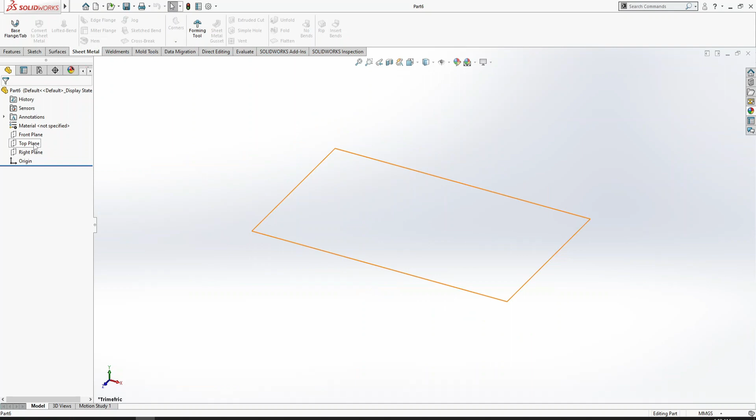To use this, first we have to create a sheet metal. For this, top plane, sketch, simply a center rectangle, make a rectangle, and dimensions. That's 150 mm, and this one 100 mm. Now sheet metal, base flange, and 2 mm, yeah, it's okay, 2 mm.

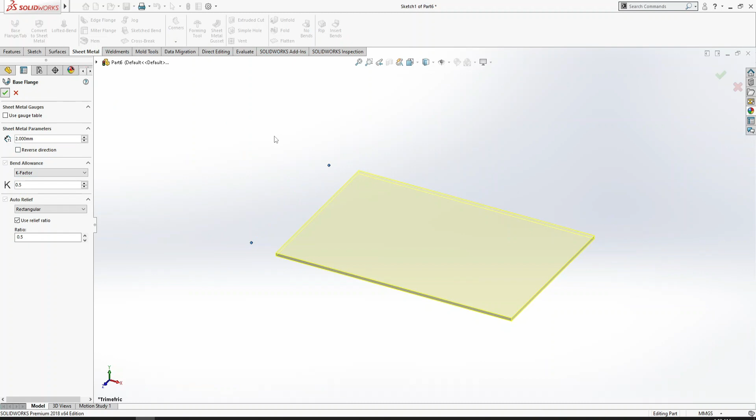Now we have created a base flange, that's one sheet metal. Now if you want to use hem, hem means curl edges of a sheet metal. So how can we use it?

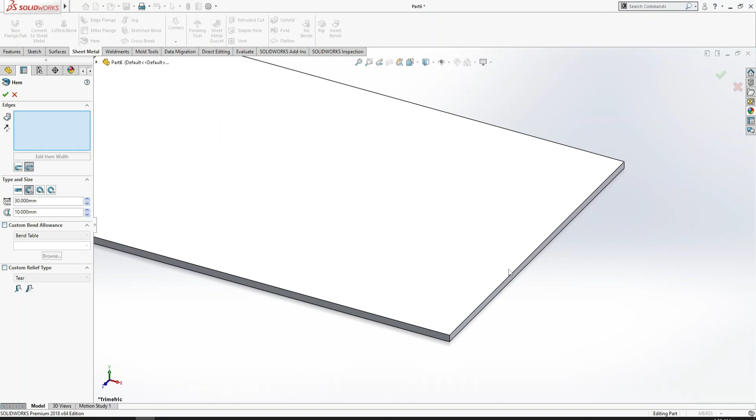If I click on hem, it's asking me to select an edge, so I have the edge here. You can see how it's going to create a hem. If I click here, it will create it inside of the sheet metal here.

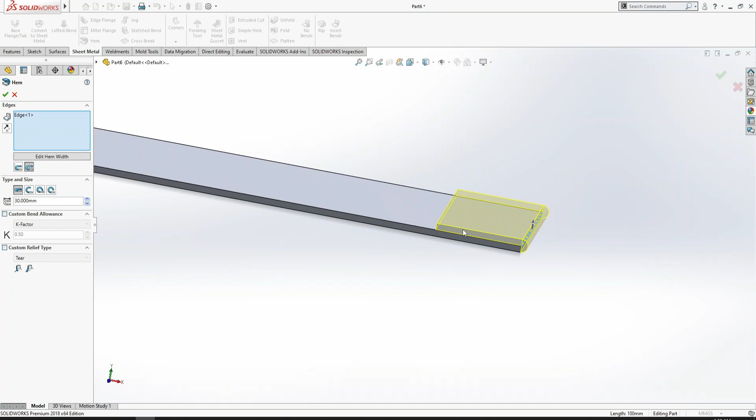We have four options for the hem. Closed hem means it will give zero space between these two surfaces. If I click on here, so I have the option radius, how much I want to give the radius. That means from here to the center of this semicircle. That's 5 mm. If I 15 mm,

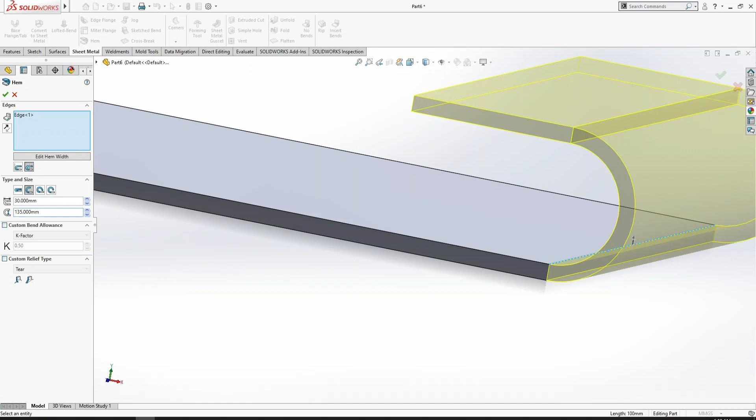15 mm, okay, again edit features. Let me explore you, this one is the second, open. The next one is teardrop, and the last one is roll.

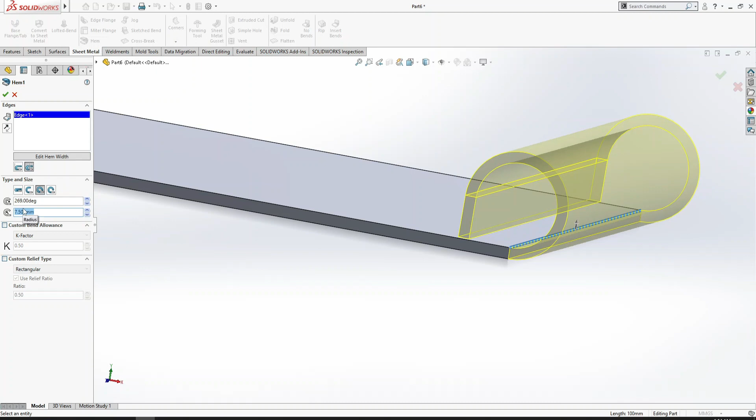So we can use only 270, 269. Okay, and I can change the radius, that means from here to here distance, 9 mm, 19 mm. You can see how it's changing.

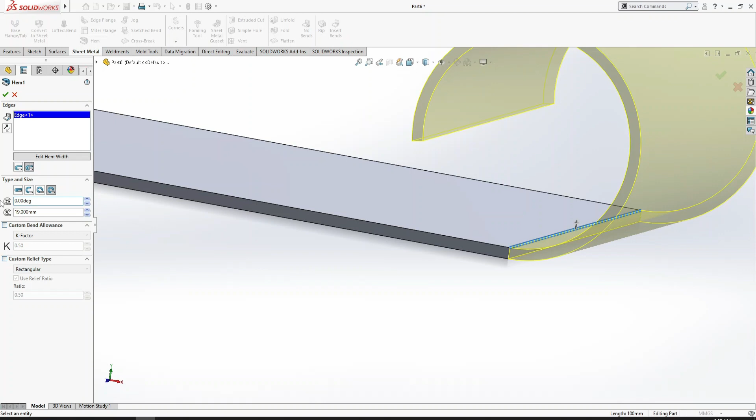And the last option is the roll. And here I can change to 80, 350, it's okay.

It's going to create a roll. Let's change 30 mm, okay it's going to be too much, 10 mm.

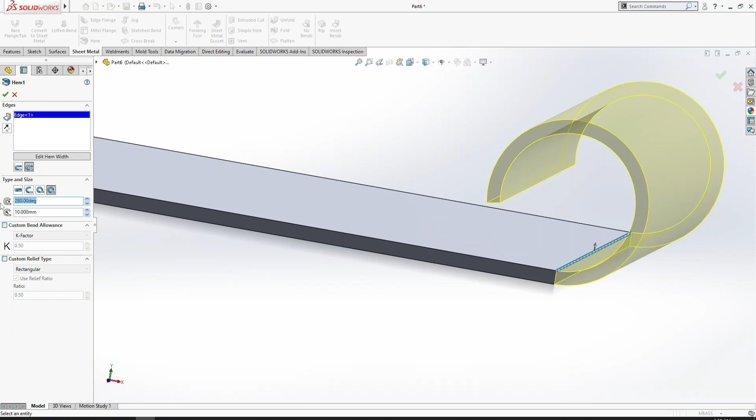Edit features, and now it's time to change. 100, if I select 130, if I select 150, you can see how it's changing.

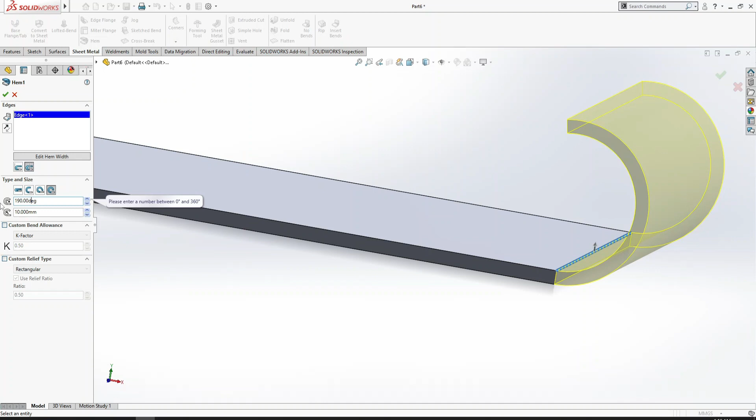190, 230, 230, 260, and the last 360, okay wait a minute, 350, you can see it's going to be rolled.

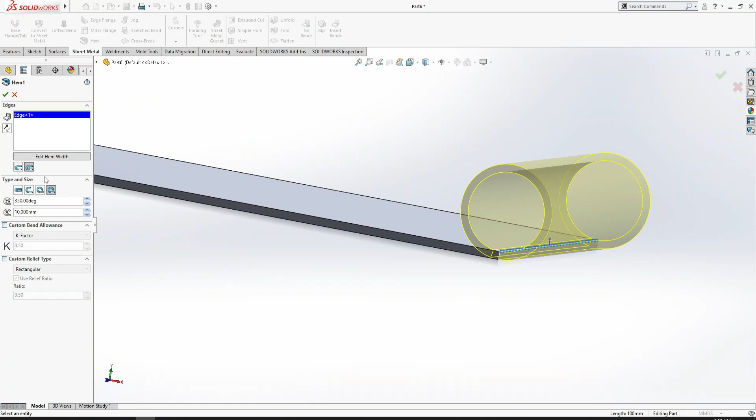So we can use these four options as per our need. Okay, now you can see how it's going to be on one side here.

That's all for this tutorial. We explored how to use this hem feature.

If you want to know how can we use edge flange and miter flange that we have done in the last two tutorials, then simply go to the previous one and learn how to use this.